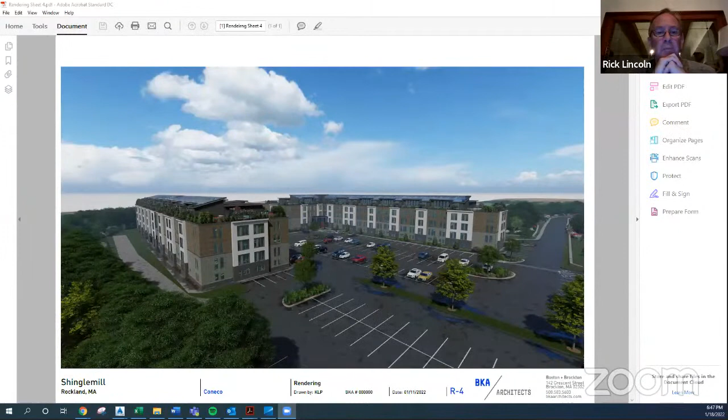So this is probably the cleanest shot, and as you can tell, it's from the far side of the site looking towards Pond Street. Off to the left there, towards the building, you're looking on the other side of the buildings, and the L is Home Depot way over there, Hingham Street.

As you can see, the entrance profile really hasn't changed. The rooftop has changed a lot, the building elevations have changed a lot, the texture, the siding and the materials used, like a cedar shingle type—that's all changed. And then the rooftop has changed dramatically.

As you can see, at least from Wilson Street, which would be way over to the right as you're looking towards the building, you'll just see the end of the building over the trees. That's also why the architects and myself created most of the rooftop green space on that side. We designed in solar, which is what I've been doing on a lot of projects, and that'll feed the electric vehicle stations and all that kind of stuff.

I guess you'd call those penthouse suites or something like that on the top. They'll be nicer units, but it has dramatically reduced, in my opinion, the massing of the whole project. Let me know if you want to look at anything else, Rick.

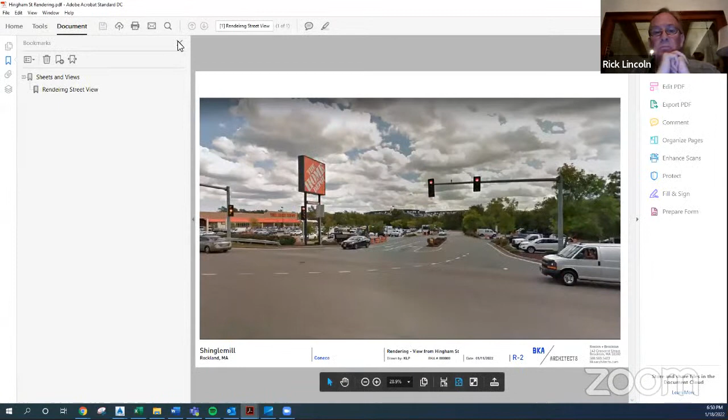There's a massing—I mean, my architects didn't like the prior massing, they didn't think it was all that accurate, but I'm not a graphics expert. They were saying this one is scaled correctly, in their terms. So it does give you a good sense coming off the highway there, the Home Depot, BMW gallery, or whatever it is over there. It does give you a sense for what the buildings will look like over the trees.

So that's a good visual of parking. You can see Wilson Street coming up off the right.

Decided to leave the outbuilding there, the amenities building. One of my versions had another L coming off the building, a 1.5 story L, but we decided that wasn't the right approach. So I left that building, moved it a little bit.

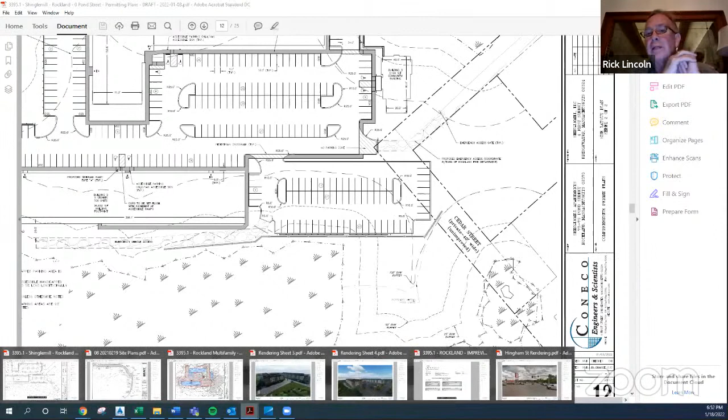We've got parking in front of it, and it's close to the apartment units. And you can see on the bottom there, right where Damien's got his, that parking used to go way down, and you can see the lot over to the right, the house. That's what I meant before by we eliminated all that area there.

We can add some parking if people aren't comfortable with a 1.55 or whatever it is on the parking ratio. Next meeting I do have some data from some of my other developments - there's something I'm doing up in the Mattapan, Boston area - just to give you a sense for how I've fared on other projects and what the parking was like and stuff.

But that's a good visual right there. You can see the green rectangle is where the other gentleman had their bar, and we just flipped it to the other side.

So I think that's that. Would you like to discuss? Well, can you just kind of fly through here real quick, and then I'm sure there'll be plenty of questions. Just run through the general plans?

No, I'm good with the plans. Yeah, I think that's it, Chairman. You can see the main access in Wilson Street and everything else, like I mentioned before, hasn't really changed at all. No, it's understood.

Are you proposing those same trails going out in the back? Yes. My intent is to come in with traverse, a full-blown landscape architectural plan. It's beautiful land back there, so it'd be great for just some walking trails, and that's it. Maybe a few park benches or something like that, but I don't think anybody wants to see us do too much back there.

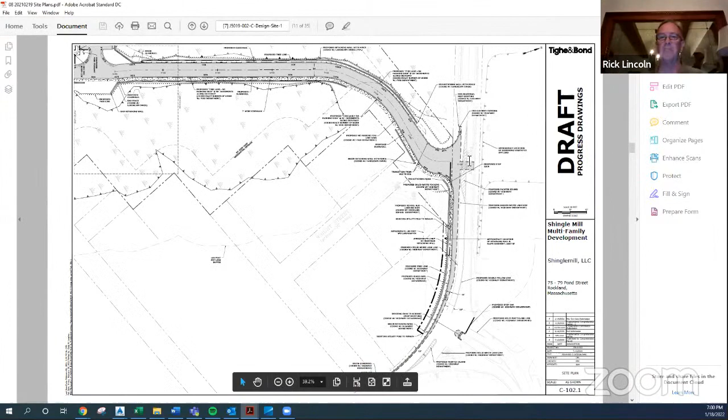Is that it, Damien? Yes. So this is the Tighe & Bond plan. Our entrance, it's going to match this, very similar. But this is from the Tighe & Bond that was previously shown.

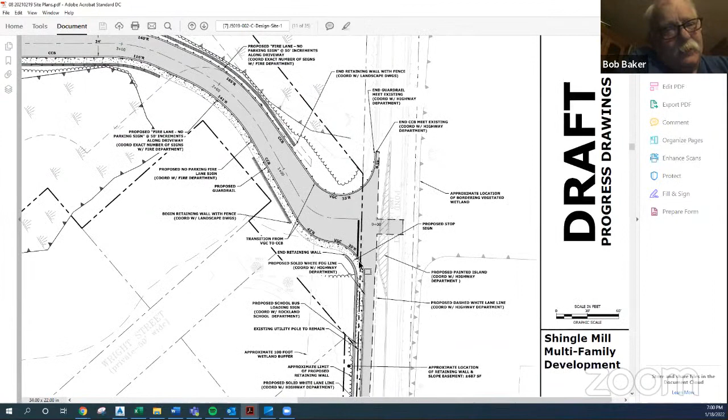Right, you're gonna end the guide rail by cutting it off, but are you gonna curb that around? You can see right here, this line right here is the guardrail. If you're cutting here, right? So these dots along the edge of the curb right there, our plan will match that. Same thing on the back side over here, where, I mean, this looks like it extends down the entire roadway. So we will be curbing it, if that is the answer to your question. Okay, thank you.

On that supplement page 12, you had up there with all the parking and stuff on it, red and blue, could you pull that up? Yeah, this is fine, the red and blue color. Oh, but you were asking for the colorized one. Yeah.

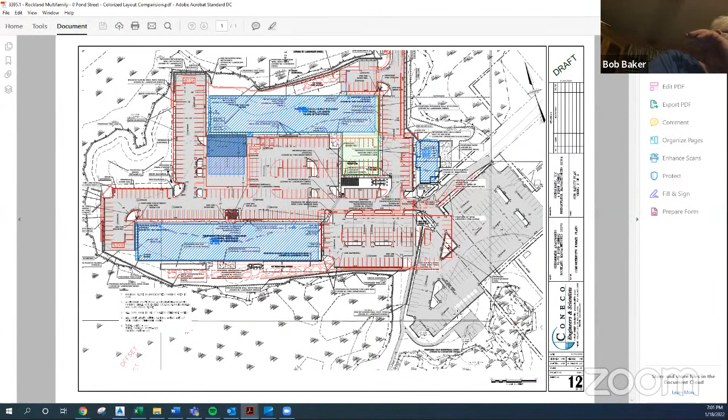You have Cedar Street as an unapproved street, an unimproved street. Who owns that street? Who actually owns that property?

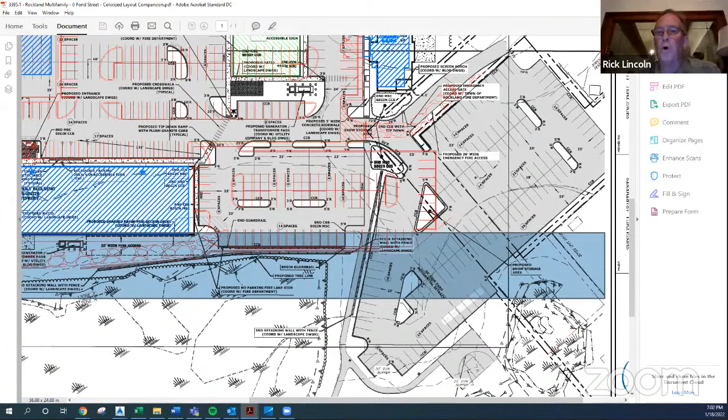Rick, do you want to handle this or what? I mean, probably Walter. I know that was discussed with both Rockland Town Council, I thought, and then Jones Street Town Council. And Walter, do you know the answer to that? So I don't remember, and we have the information and we can get it to you. The Jones Street had their title insurance company do quite a bit of title work on that area.

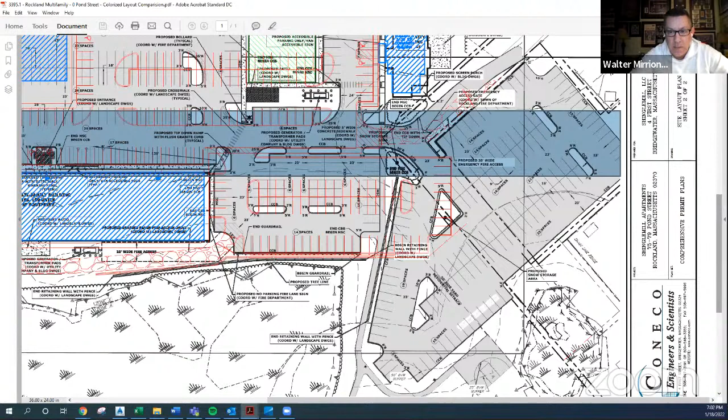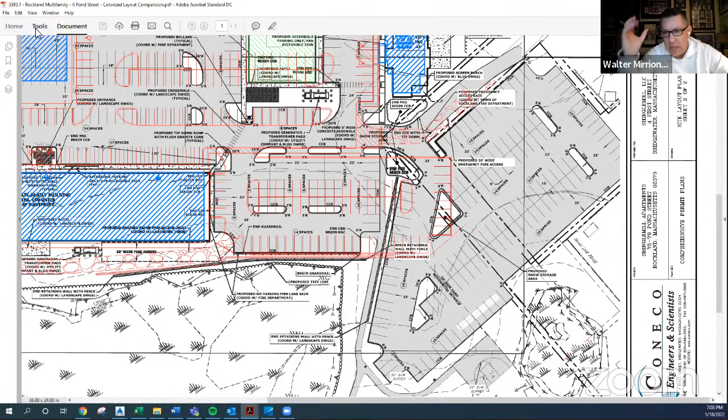The conclusion was that the developer, Rick, the owner of this property, had the right to make the improvements shown on this plan, including within Cedar Street at the lengths that it's being made. But I don't remember who they concluded had actual fee ownership. Can we go to a different plan that shows what you're proposing over those two streets? This one is better because it shows the information and we can share it with you. They did a lot of title work on it, back title, and the title company made conclusions that allowed for the improvements to be made.

They definitely state in those conclusions who the owner is, I just don't remember. But they're confident enough that they're willing to offer title insurance for the improvements over those two sections of those two streets. I'll get you the answer to the owner after the meeting. I just don't have it in front of me.

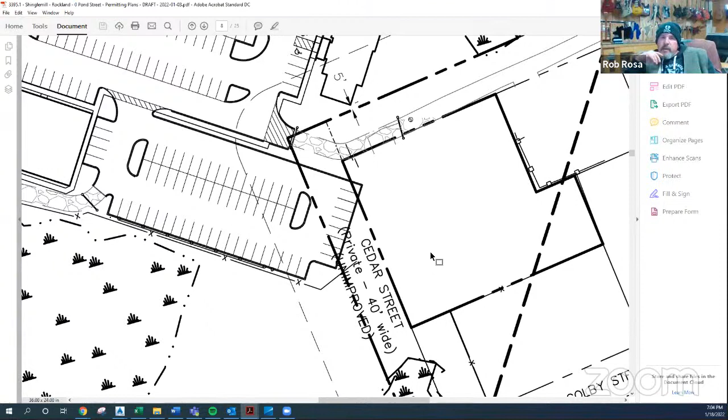It was that Rick had the right to complete the improvements that they then designed and showed on the plans, as shown in that previous version that has now been reduced. Appreciate that. Attorney Galvin, the question still stands: wouldn't derelict fee statute typically apply in a situation like this with a private road?

It's hard to say because I don't know when the street was laid out. I don't know whether the owner owned both sides of the street. It's impossible to say on the basis of what I have right now. The derelict fee statute would award the fee to the abutting property owners to the middle of the street, with an easement in the other portion of it. But the problem is they just don't know, on the basis of the facts, whether the owner reserved the rights in the street or whether it was truly left unspoken for, which would result in the derelict fee statute applying.

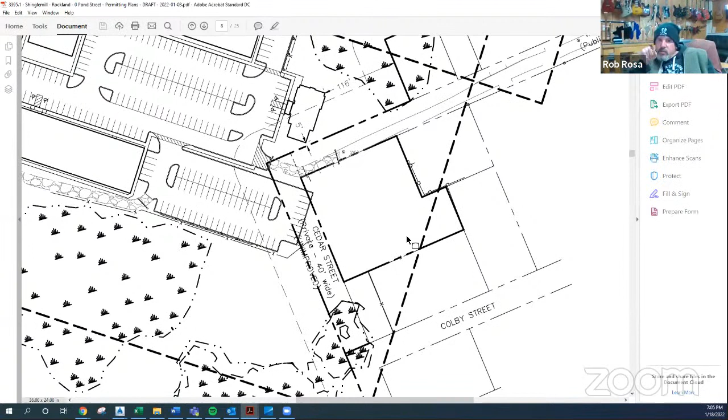The problem is that at this point, they show that Wilson Street is public. I just don't know where it's public to. I don't know - I know the latter portion of it isn't constructed. It's unconstructed, a private road, and again, it was a simultaneous conveyance, and they did not specifically retain rights in the roadway.

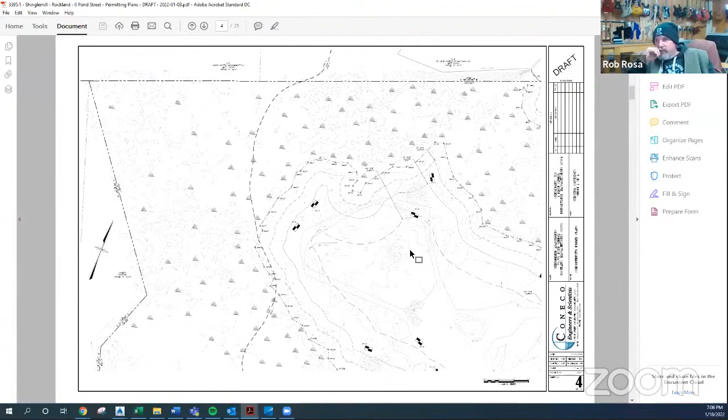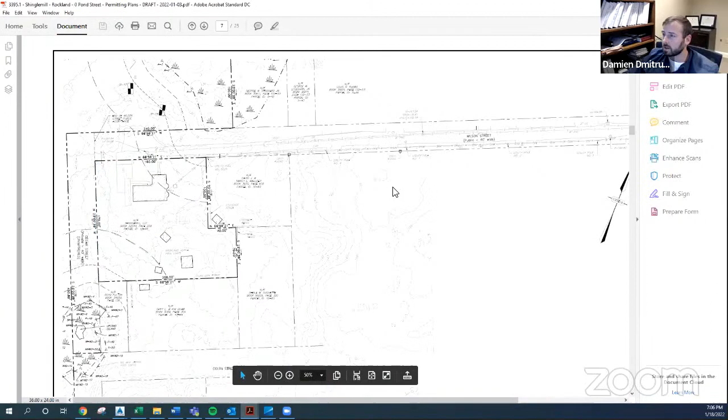I do have the plan showing - I think this was previously an end of Wilson Street public acceptance. And that makes sense at the end of the last house on the road. So this is that property, and that line shown is here. So that makes sense - the end of public acceptance is at the end of Wilson Street.

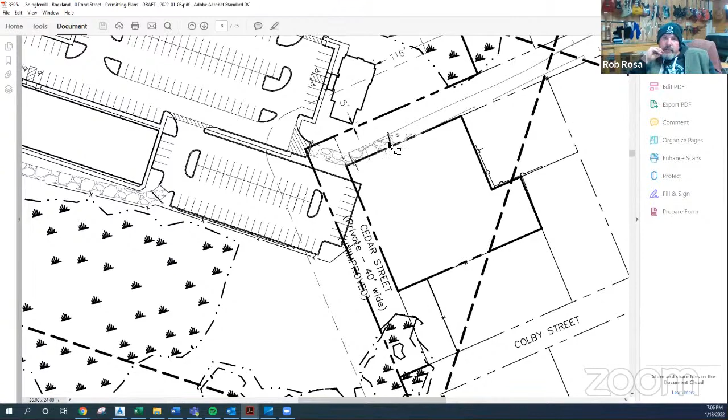So basically, all that riprap and all that stone that you're trying to put into the roadway is in the public way, and that gate is in the public way.

Does that answer any of your questions? What I'm getting at is we need to know who owns, who has the rights to the Cedar Street property, before we can allow them to put a parking lot or anything there on that private way that it's being called.

Based on what I know of that roadway, and the limited knowledge I have on property law, I believe that based on the simultaneous conveyance of the plan, the derelict fee statute would come into play there because they're going to end up owning to the center line. Each abutter is going to own to the center line, and it does not go beyond the Wilson Street property, the end of the corner of the Wilson Street property as it's going down Cedar Street. It's just a matter of who has the right to use it. It's an unconstructed way, so that's where it gets tricky. I could be wrong. I don't think I am, but I could be wrong.

I still think what it really comes down to is who has the right to pass and repass over that. Based on the last design where they were paving over onto Wilson Street, the way they designed it, there was a pass through all the way down. So if it came down to it, if those people had rights to do it, they could pass and repass on foot, most specifically, down and over. It wasn't blocked, so I think that's why they did it. But again, I hear you, I understand you, and I think we need an answer to that question.

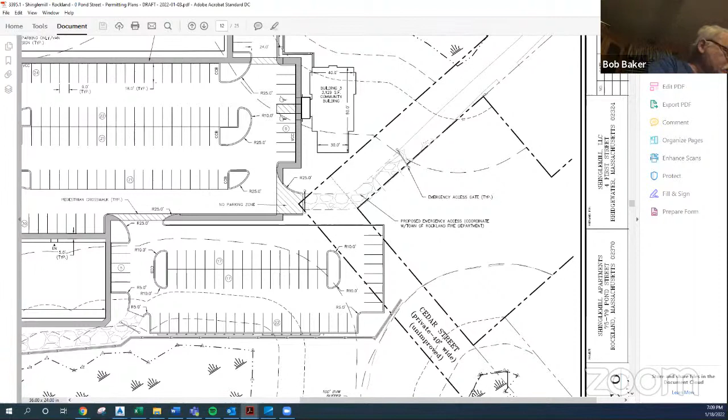One other question: the plans show 2 hydrants here. Was that cleared by the fire department? Because I don't see anything in their letter about any other hydrants. Mr. Baker, that'll get nailed down tight before the next session with the fire folks.

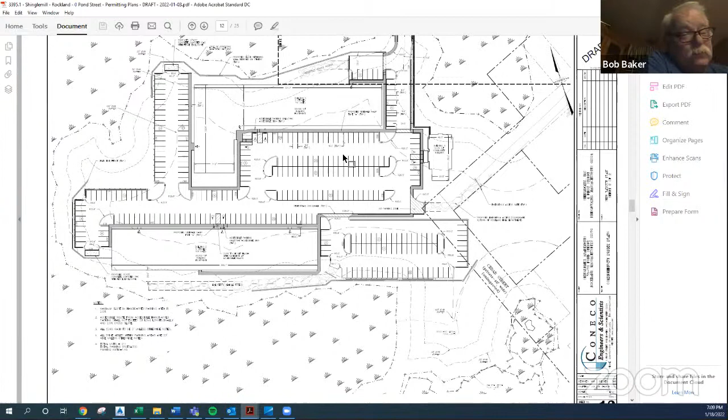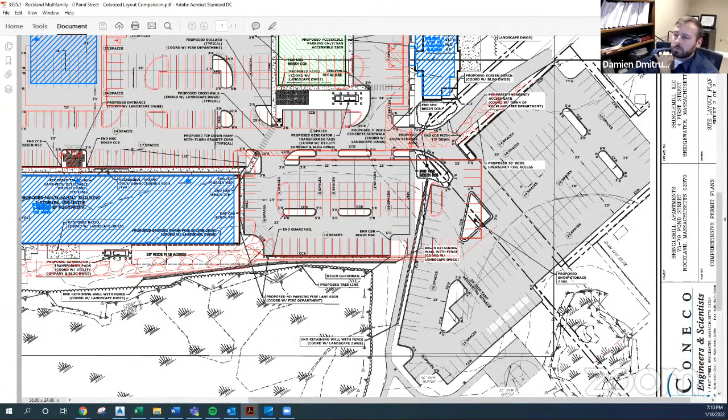One other thing: there were 2 little islands proposed for snow storage on the red, white, and blue sign. You had one towards Wilson Street, so I'm guessing that note is from the previous Tighe and Bond plans. I think you're going to need a lot more snow storage here.

Yeah, I concur. The other thing is, are you aware that this is going to have to be a no salt area? Strictly no salt. So anybody doing your snow removal, sanding, or salting will not be able to bring in a truck that has salt in it, because this is where a lot of that water is going to end up down the reservoir. We can't have sodium chloride specifically.

It would be one of the conditions if we approve this. And how do we police the no salt district? The zoning enforcement officer. We could put in a condition that there would be a fine if we found that salt was being spread on the parking lot in the winter.

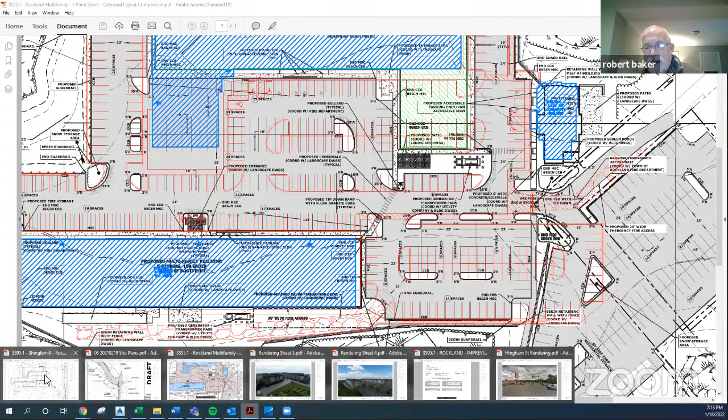Just a couple of follow-up questions on Mr. Baker's points, and please forgive me if some of these are uninformed. I came into this process when the application had been well underway, so forgive me if I need to be brought up to speed. Is it my understanding that at some point, in the current or a prior iteration of the plan, Cedar Street was supposed to be used for fire access?

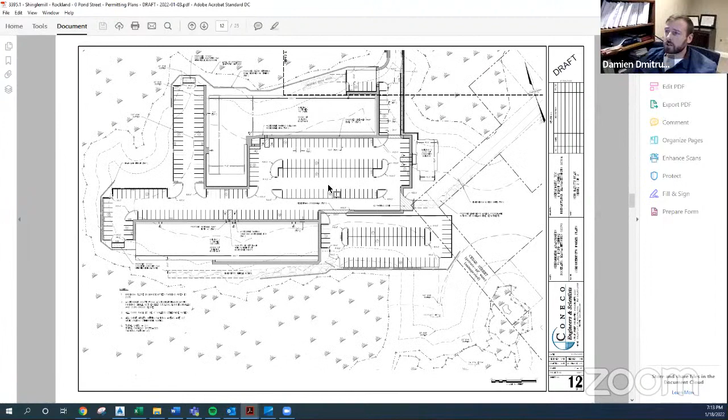No, no, all right, sorry. On the question of the 2 fire hydrants, based on your answer, were they placed without consultation up to this point with the fire department? The location of the fire hydrants, which I'll see if I can pull up here - I've been working on this project since before Tighe and Bond. There was one shown here that was in consultation with the fire department for easy access if anything were to happen in these areas, reaching out to the wetlands.

Granted, as Rick had said earlier, I don't know if they've seen these plan sets specifically, though they did have their comment letter. We will be contacting them and working more with them to resolve any hydrant issues. Okay, but as to the specific current or proposed location, the answer to my question is no. Okay, yes, they are relatively located.

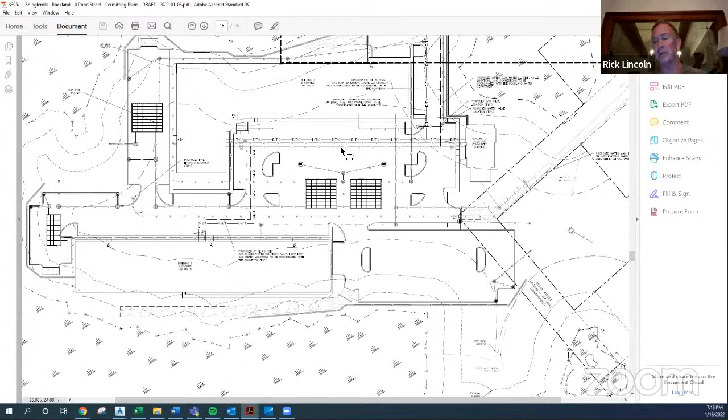Hi, this is Rick again. So the pump test is, we know there's enough supply. The pump drawdown test, if you will, is really meant to determine or make sure there's no surface impact, for instance in the wetlands. So these piezometers, they run around and put measuring devices within a radius of the respective pump tests, and they can measure any potential drawdown. We don't think there will be.

That's just an opinion, but these wells are 700 or 800 feet down in bedrock. But that is a requirement by DEP. Honestly, I was going to do it in the fall, but we kept hearing that the water department was testing a particular station. The short story is I would prefer to hook up to town water, no doubt.

But we'll probably wait on the pump test until closer to spring, which hopefully isn't that far off, a couple of months. I appreciate your confidence that there's plenty of water there. How do you know? Well, they did some preliminary tests when they drilled the wells, and we've got the engineering demand study, so we know exactly what DEP requires for that bedroom count out there.

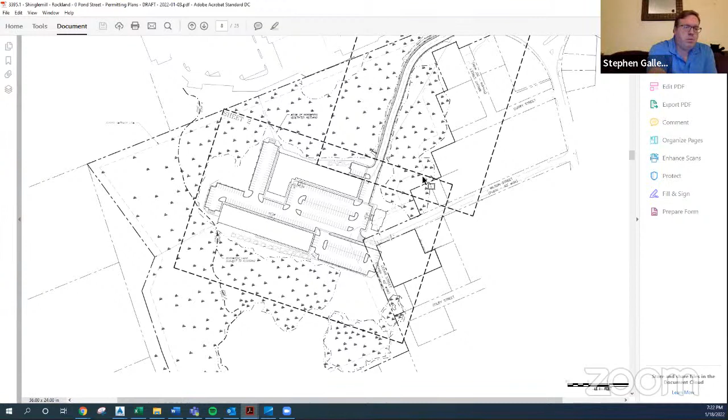Keeping going around, going to board member Timothy Haynes. Mr. Haynes, talk to me, sir. Oh, hi. I don't want to beat a dead horse, but in the conversation about Cedar Street, I wasn't clear about a couple of things that came up.

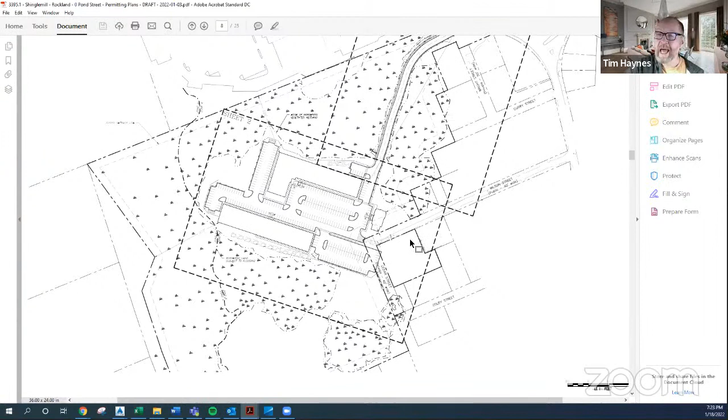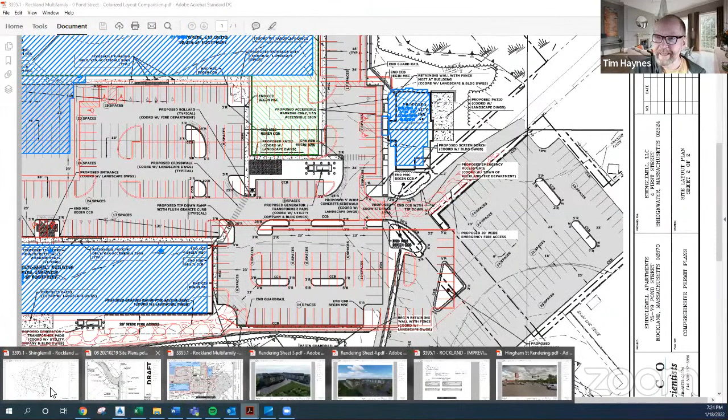One was the previous proposal having a gated emergency access to that way, and one of the answers we got to that question was no, but I'm under the impression that was something the fire department wanted. So it's on the overlay plan, the old and new together, so it's still showing from the old plan. In conjunction with that, that publicly accepted part of the road has a lot of new grading on it, so I'm not clear what's being proposed or eliminated there. Could you clarify: is there going to be emergency access there? Are you waiting to hear from the fire department if they still need it? And is your plan to put the grading shown on the grading plan into that public portion of the street?

Well, I'll take the easy one. I know the fire department still wants it. I won't put words in their mouths, but that's generally the case, right, just a secondary way in and out.

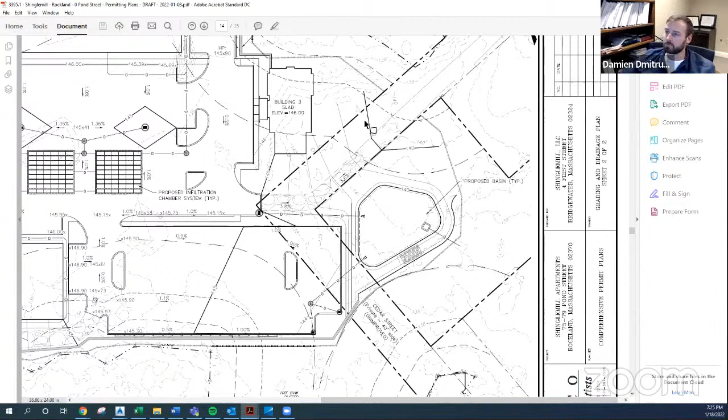The grading, Damien, I don't know if you can comment on that. Yeah, so the grading is required for the access to bring the site up. We can tighten it, we're just trying to make it safe there, calling in the grade, trying to step us up so we can get into the site cleanly and smoothly. I think you're talking about access on Cedar Street, that was never proposed.

There has always been, in the old plans, this gravel kind of hatched area right here as the access. So yes, that access is still there, and the grading is tied in that way. If you were to build a road, I would imagine it is a public access way, but we will be preventing it due to fire emergency, there is no access to other sites. So the grading is to provide access to our site, which happens often. With many sites, you grade at the front of the entrance into public ways, it's part of access.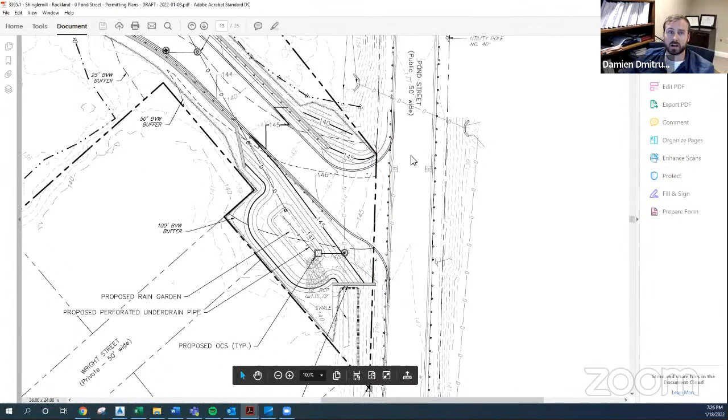Great clarification, I think I agree with you, it's probably going to be desirable, but it looked like you were making some grading changes to a public way. That goes to the question of who owns that street at that point, because it's beyond the publicly accepted line. Yeah, but it happens that there is grading and access done, access is required to get into the site, and it's done in a public way, it happens with any type of development. Absolutely, so grading and access to a development happens in the public right of way, I guess, as normal circumstance. Agreed.

I'm just pointing it out to wrap up that conversation from earlier, where there were some conflicts in what was being answered in terms of access, getting fire department access, and improvements. The improvements that Bob was talking about were on the paper road side, but I just wanted to point out that in fact it is on the public side as well, so I just want to make sure that's clear.

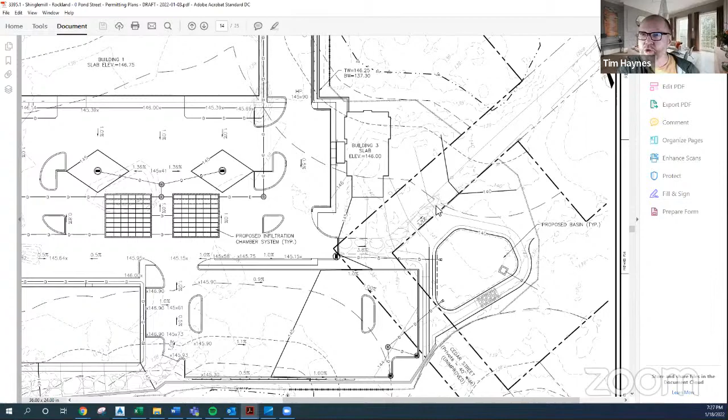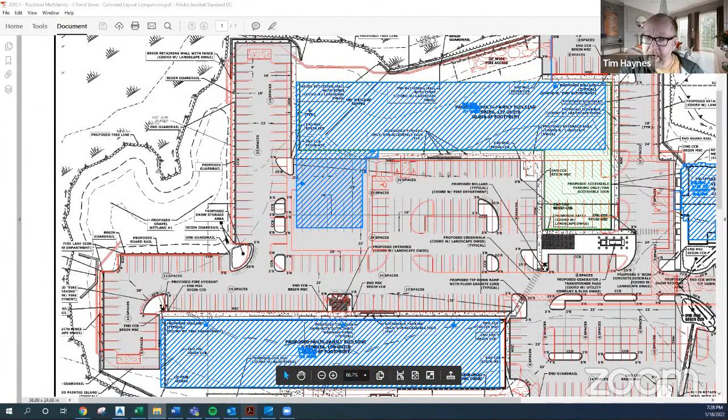On this plan, the one numbered 12, your grading plan, could you clarify where we're talking about on the upper left side, on the grading plan? The plan that I have, that one, could you clarify what's going on with the grading there? Because it wasn't clear to me what's being eliminated over there and how it's leveled, and whether that's now going to be at the grade elevation of the parking lots, or is there still going to be that drop off before it becomes level?

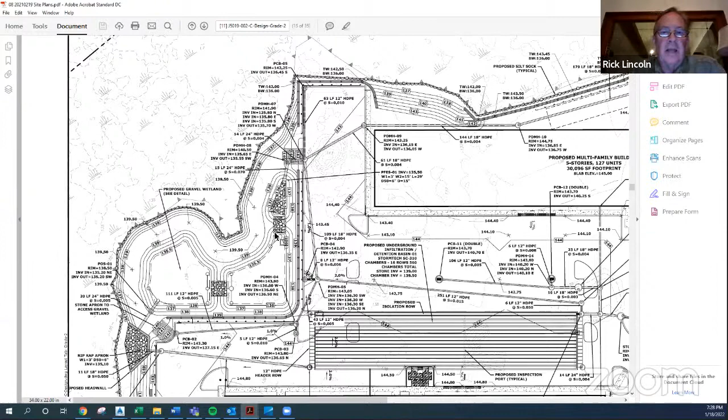Haynes, I will probably eat crow on that one right now, because when I saw that, there's obviously a disconnect between the architectural rendering and Damien's plan. That's not the plan, Damien. I was trying to show the differences between what was previously there.

You did indicate in your conversations that the grading shown on the architectural plans here isn't clear on the fact that grading does go down. That will be landscaped area along that edge. We're just catching grade as quickly as we can, going down at a safe, normal slope to get into and avoid as much impact into our buffer area as shown. But we could potentially run that retaining wall down there and connect to the other retaining wall along that whole edge and stay out of the 25 foot.

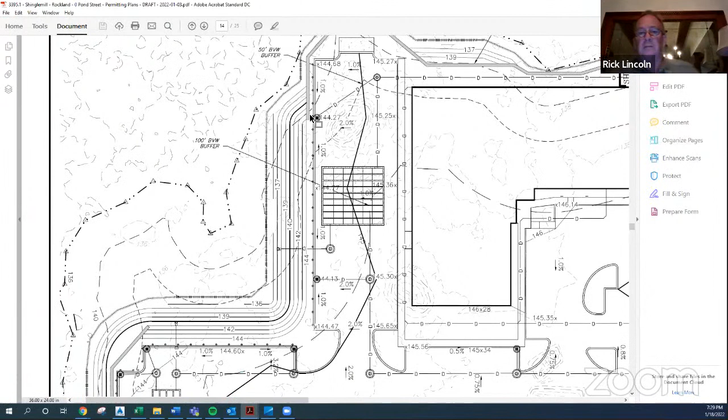And that's my bad. So yeah, obviously there's some disconnect between the things we were talking about and the rendering and the grading plan.

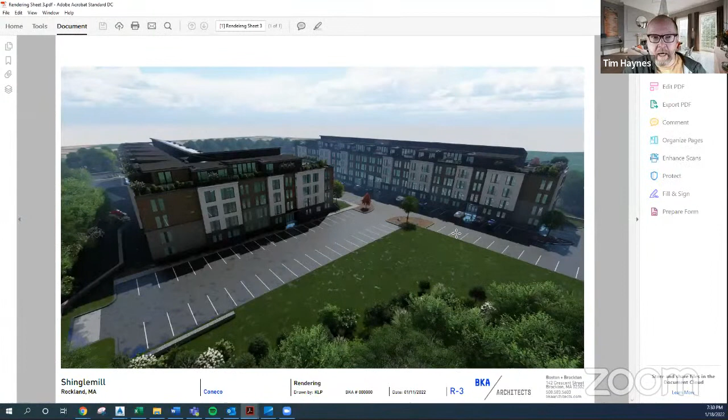So the reason I wanted clarification on it, besides just the disconnect, is one, to tell you that the architecturals are significantly improved, in my own opinion. They respond to our architectural reviewers' comments. I think the massing is good, the style is great, the materials are vastly improved. So I think that deserves commendation for what you're doing there. It's just significantly better than the previous architecturals.

It responds to those comments, but we have never been able to get any traction on a significant issue, which I thought was going to be resolved in that green space, if that was level on that side. And it's that when we would ask about affordable plans, having enough room for families to live in, for kids to be here, for people of all family dynamics to enjoy the affordable housing coming to our community, there's a clubhouse and some dog walking and some outside trails, but we never really got recreational facilities for all ages, and particularly for families with kids, places where people have to take strollers or kids who have to ride bikes. We talked a lot in our hearings about this shortcoming.

You've got a very isolated site, and there's no playground. There's just nothing for all ages. It's got a clubhouse and a half court. We even talked about the sidewalk being on the other side of the road so they could connect and ride back into the neighborhoods. We talked about connections on the surface to ride bikes and to connect into the fabric of the neighboring streets so kids could visit friends. None of those things have been addressed, and it's a real shortcoming of the project.

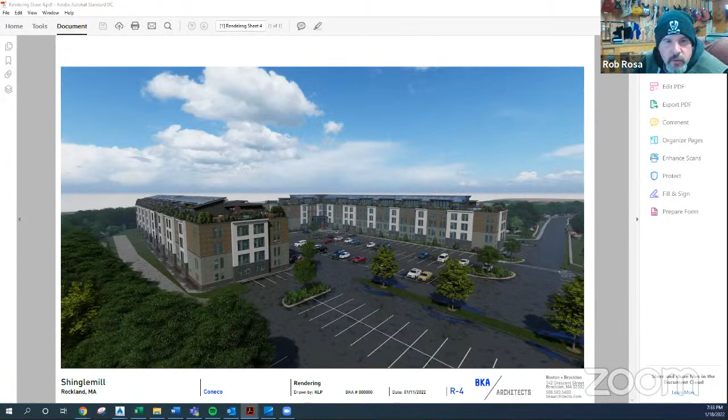Mr. Haynes, thank you. Question for you -- you appreciated the renderings as such? Yeah, awesome, really great use of massing, really great. If you can have that much greenery on the roofs and keep it alive, I think it's a tremendous improvement.

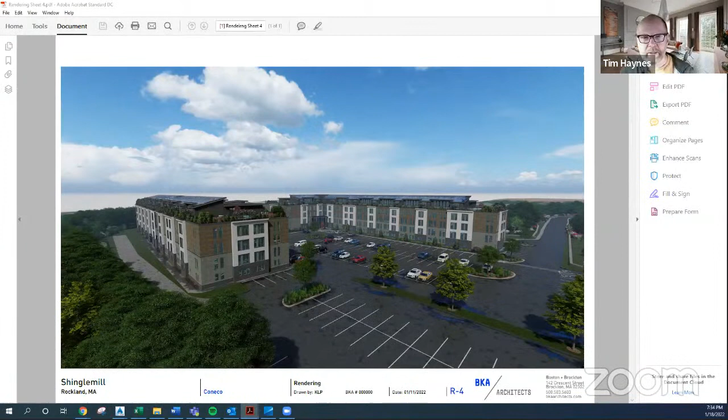Nice. I like how they incorporated all the oil spots on the parking lot for all the people paying too much for their apartments -- they can't afford to maintain their cars. I like how they did that. That's true to life. That's cool.

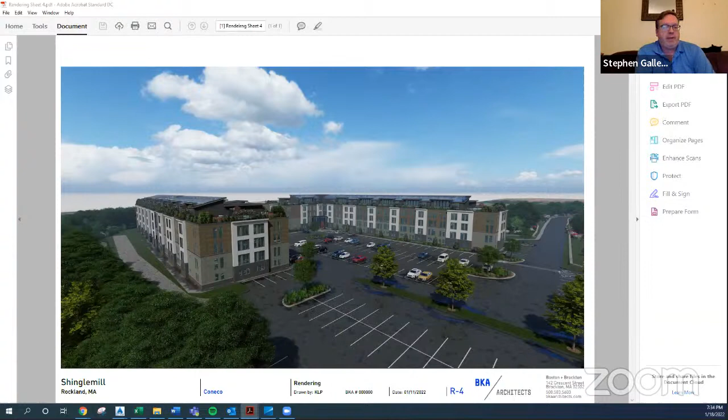One thing I wanted to ask about earlier, Mr. Lincoln mentioned that we reduced the parking ratio from the prior document to 1.55. I remember we were talking about parking, and it was a tense thing where we wanted more, and it seemed like we reached a ratio people mostly agreed on. His comment was that 1.55 would be more than most of his other properties, and later he mentioned Mattapan in the Boston area. My thought is, if he's comparing it to Mattapan, that's an area with more public transportation. So I'm wondering if he's comparing this ratio to other similar projects where most people drive.

If you're a resident of Rockland, you can't walk to the supermarket or the gas station. Not that you wouldn't drive to a gas station, but if you wanted to get a pack of cigarettes or a bottle of soda, you can't walk there. You have to drive everywhere here. Want a gallon of milk? Diapers? You have to drive everywhere. So when he says this parking ratio is higher than his other properties, is he comparing it to similar populations and areas like Rockland, where you have to drive everywhere? That's my question.

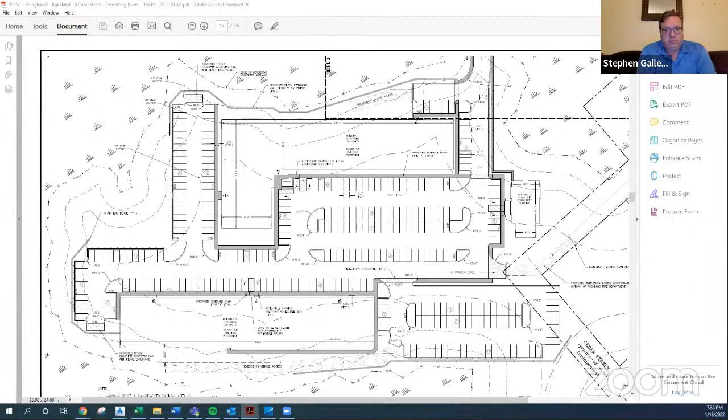Chairman, can I? Absolutely, go for it. This is Rick - that's a perfectly fair question. Maybe the Mattapan comparison was a mistake, although that particular project does have public transportation there, though you can walk somewhere within half a mile. And City of Boston probably isn't a fair comparison, because they have a parking ratio regulation of 1.0 or less. Whether that makes sense or not, to me that's a bit arbitrary.

So I did two projects in Hanover. There's one in Easton, I did one in North Attleboro. The one in Easton is a new permit and we're aiming for one. The town there took a different approach and wanted me to drop the parking because they wanted green space and less impervious surface. The stuff in Hanover, honestly, there wasn't a lot of input either way. There's one I did next to Cardinal Cushing, across from the Oz - that's like a 1.39 or 1.4.

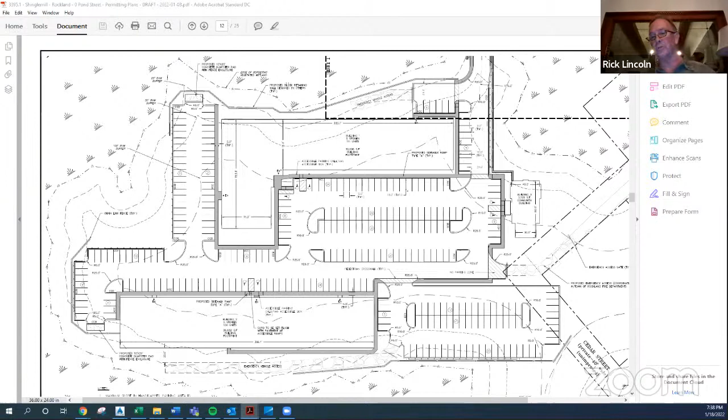Mr. Haynes, to back up, I agree with the whole amenity thing. I'll say that on the parking topic, Mr. Galley, we've run statistics on the number of kids in the apartments, because back in the day, 10-15 years ago, the fear was always kids in the schools. The number of children in these apartments - I don't know if it's the rental rates or just people in general these days - but you tend not to get any children at all in these developments. I'm not negating that we need more amenities, but at least in my experience, that's what we've discovered. Sorry I digressed a bit, Mr. Galley.

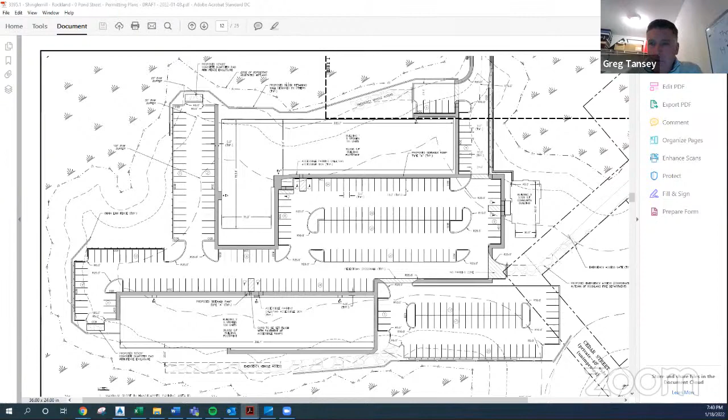My concerns have not changed. My concern about this site - I've got concerns about the parking, I've got concerns about the well. Where are the wells located? Just out of reference.

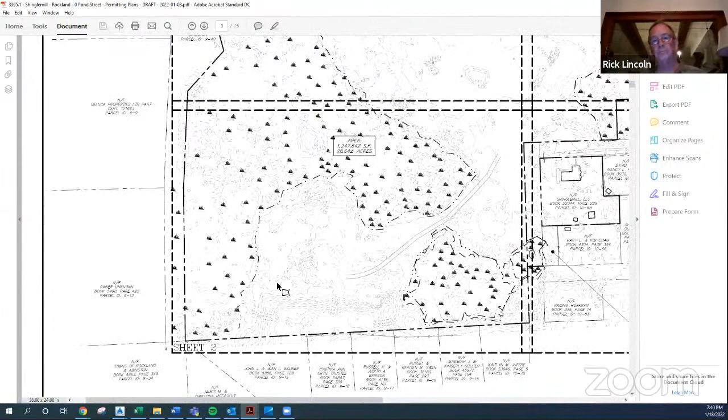Yep, that's where all the walking trails were or are. Could you show me relative to the site development? Yeah, down there. Is there a cluster of three? Yes. One or two tend to get used - DEP requires a third well.

And when were these installed? It's a guess, maybe last year - with COVID, it could be a year and a half, I don't recall honestly. So you installed them without an order of conditions? Yes.

Where is Zone A to the reservoir, the tributaries to the reservoir, relative to where those wells are? I don't know if you have that map, Damien. Honestly, I'd probably let on-site engineering speak, because I'm not as well versed with Zone A and public water supply, not the reservoir, but the 3 wells that we're proposing.

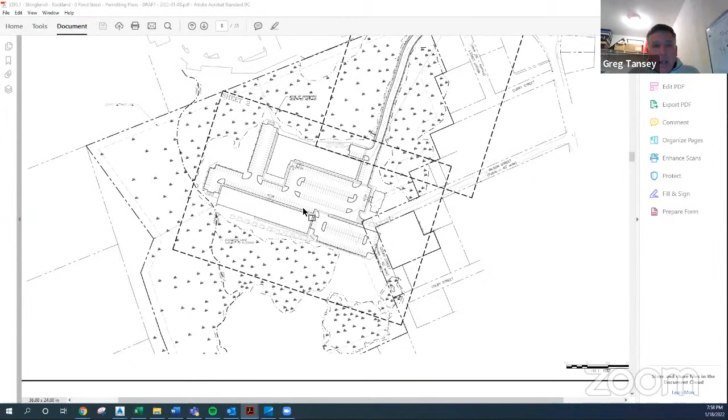If you had taken it serious, you'd at least be showing the tributary areas and the associated Zone A aquifer protection areas on the plan, and how they relate to where your wells are located and your stormwater recharge units are located. I don't see, on the plan that I'm looking at - this would be the perfect plan to show the tributaries, to show the Zone A areas, showing the recharge units and the wells.

I'm done, Mr. Chairman. I've said my piece.

Mic drop, Mr. Tansey. Thank you.

Can I follow up on Mr. Tansey's point? Mr. Baker Jr., please do. Thank you, sir.

In my professional life, I've seen a lot of reports that have typically contained disclaimers. I can honestly say I have never seen a report the proportion of which constitutes a disclaimer that is as high as this. You are looking at 7 substantive paragraphs of disclaimers covering almost 2 pages. Forgive me for reading this, it's just so much, I couldn't commit it to memory. But if you look at the end of the report, again, 7 paragraphs of disclaimers regarding the accuracy of the findings of the report.

On such topics as subsurface contamination, remediation of subsurface contamination, the reliability and or accuracy of the information and data they relied on in preparing their report, whether the applicant had submitted to the reporting entity all of the relevant information needed for Tighe and Bond to do their study. As Mr. Tansey already referenced, it's questionable whether PFAS were included in the analysis, and they make no guarantee, as Mr. Tansey mentioned, that the report will pass a regulatory review.

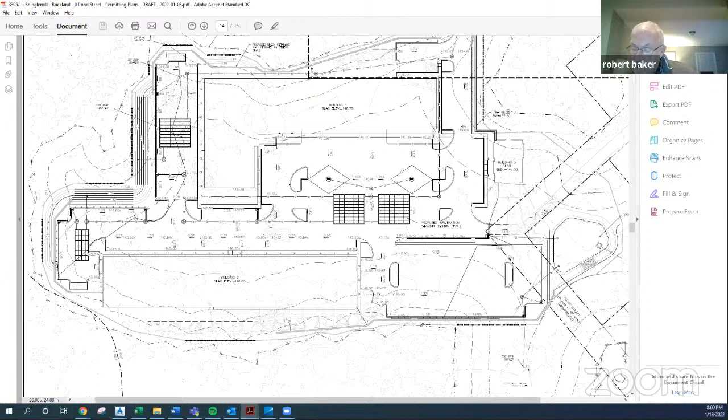Every one of these disclosures, I would suggest, are enough to suggest that we need to take a very careful look at this, and actually, forgive me for the harshness of this term, questioning every bit of information that's been submitted to us by the applicant. I mean, it's fundamental. Architecture is one thing. It's great that the project looks nice, it's wonderful that it has grass, not too much on the recreational amenities, but the safety not only of the residents of this proposed project, but the safety and health of the residents, visitors, business people of 2 towns, as Mr. Tanzi said, seems to have been not addressed in any significant way by the applicant.

Now, I realize I'm a non-voting member on this particular matter, but Mr. Chairman, would it be appropriate as such to make a couple of requests?

At this point, when it comes to requests specific to conditions, let's take it one step at a time. Mr. Baker, please, talk to me about requests.

One request I would have is that the applicant, prior to our next meeting, provide all documents from the DEP authorizing the digging of the wells to which he referred. Second request, similarly, that the applicant provide all the data and information used by Tighe & Bond in preparing their report.

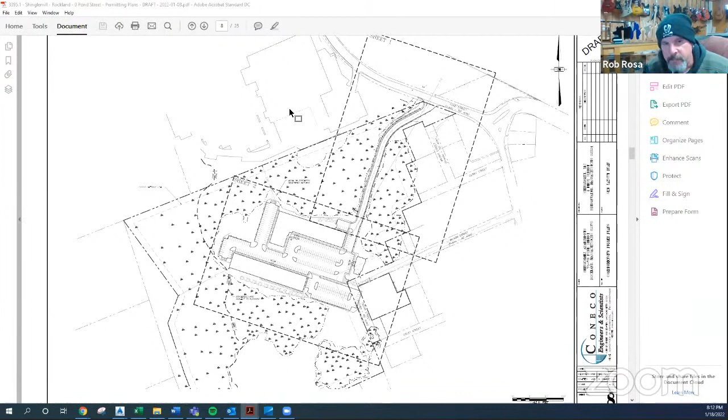Mr. Tansey, let me interrupt you real quick. Mr. Lincoln, have you read the test report? So let me back up a second — the short answer is no, sir, please answer my question. Have you read it? The short answer is no, because I didn't commission it.

I wasn't involved. Coneco's report, I did read. Okay, why do we have — and again, do we have a copy of this Coneco report? You should have — like Greg alluded to, it has been a while so I've forgotten, but we've submitted all of that data.

I will say I get the distrust of the big fancy engineering firm with all the disclaimers, and I'm not going to defend them. But the one disclaimer where they talk about the regulatory audit, that is fairly common in the environmental business. What that really means is that DEP, on all these sites, when these reports get filed, has the right to come in and audit — could be 3 years, could be 7 years, could be 10 years.

It's no different than a CPA firm with their disclaimers — they may give an audit on a firm, but they're not going to guarantee there's been no embezzlement. That's all they're saying. They'll defend their report with DEP, but they can't guarantee DEP won't arrive and make them do more work. That's all that means. Respectfully, Mr. Lincoln, a nine-paragraph disclaimer is not typical in any endeavor.

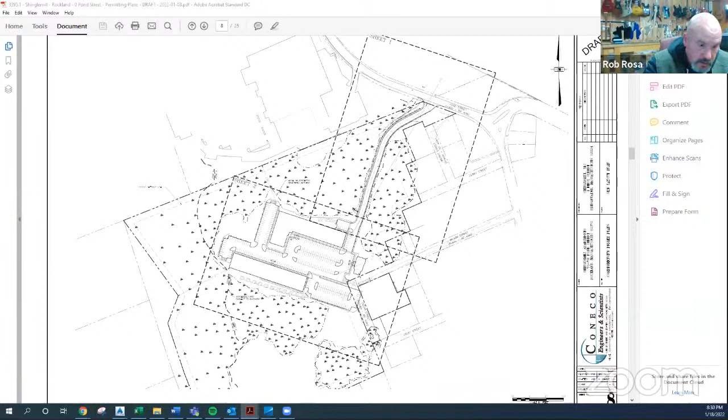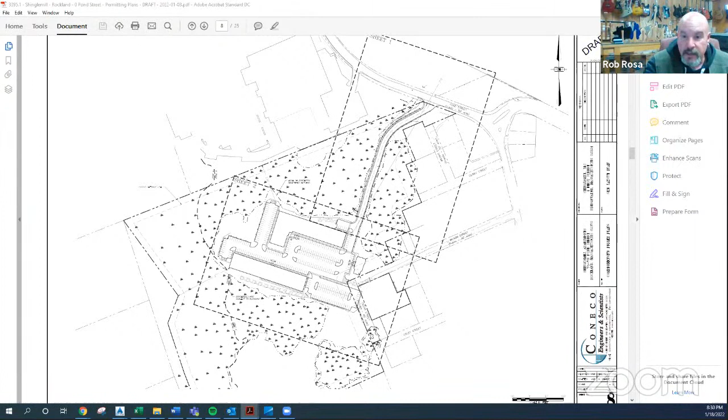Either way, we're gonna have to have an amount of money to fund the engineering. I don't know the estimate, I don't know what's in the engineering account at this point. So we're gonna have to review the engineering account, talk to Pat Brennan, get his estimate on what it's gonna take to do that. We're gonna have to get a number from the LSP too, but we can't do that until we get the documentation.

There's our architectural and design review as well. That's again up to Mr. Lincoln if he wants to pay for this. We do have the right to request it. Let's stick with the environmental first and see if we can get through it.

I'd love to put BKA in, have a chat with somebody, but honestly, it's not de minimis, but I just want one step at a time, if you don't mind. I appreciate that, I absolutely do appreciate that.

That was a peer review that we had, and so it's somebody who's on board. It's just we have all new architectural. So it's okay to defer it, but it'll just make the process go that much longer.

So Mr. Lincoln, from what I'm hearing, you want to look at the engineering and environmental stuff first, if you don't mind. Tim, does that work? Because again, we're gonna have to look at a pro forma too, because we never got answers on the last one.

Yeah, absolutely. I think it's good we will have a conversation about the things that we would expect as we move along. The timing, the pace at which we go, is determined by when we get information, and then having a peer review with that information, and then coming back with a response. So, no, I agree with you.

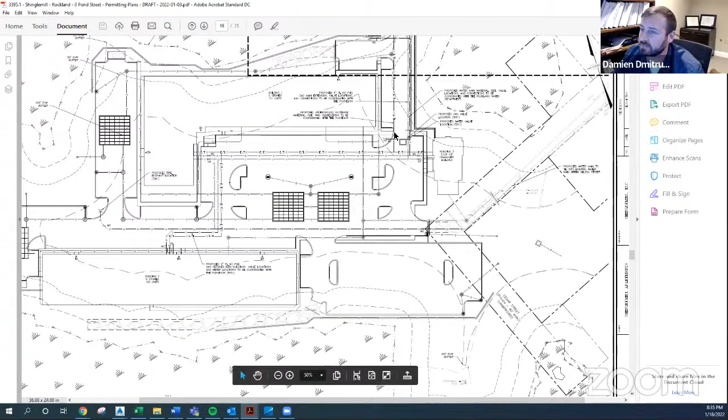I will note that last line, where no dead end water mains, that the fire main water should be looped. We currently do have it shown this way coming up and through the site, so that's already been answered. Okay, but as far as the other stuff, that's just details, that shouldn't be an issue of pulling together.

All right, what I'm gonna suggest at this point is don't touch it. We're gonna basically supply Pat Brennan with a copy of the site plans, a copy of anything else that comes in. I think that's the only thing thus far that's gonna come in. So we'll give him the site plans, the fire letter, and he'll start reviewing everything based on that.

I'm thinking we can give permission for you guys to talk back and forth, maybe take care of some stuff prior to the meeting, prior to him coming back, try to speed things up. Because are we like 2 years into this now? That's what it feels like, a very long time. So if we can try to speed this up, however it lands, it would be nice. So, Mr. Lincoln, does that work?

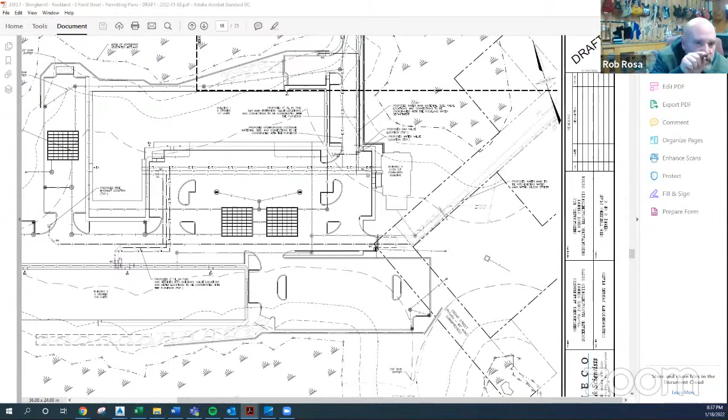Yes, sir. Giving permission for Pat Brennan and your engineer, Mr. Dmitruk, to talk. All right, Ward, is that okay? Do you think we can allow Pat Brennan and Coneco to talk back and forth to try and speed some of this up? Is that fine? All right, so that's fine.

Don't forget, not needed now in the interest of kicking a few things as information develops, but we did have a traffic study, and as the amount of parking and number of units changes, we'll want some review on the changes. It's certainly not going to be as extensive as we had, but there's somebody to review - that's Gill and Associates. So we're going to have Mr. Gillen look at the plans, come up with a number for review purposes.

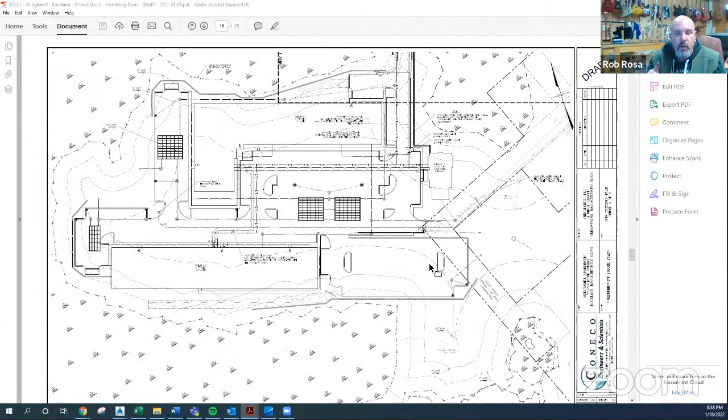I'll gladly call Pat tomorrow morning so he's aware of this. Deb, there's going to be money coming in for Pat Brennan, for Gill and Associates. Basically 3 checks, I think that's how it should be - 3 individual checks, one for engineering review, one for traffic study, and one for LSP.

Mr. Galvin, do you have anything to say at this point? I think we've exhausted everything, and we all know that this is kind of a... No, we'll help you get the appropriate person to read the Tighe & Bond report. What I was looking through on my notes is to see whether that Tighe & Bond report was ever submitted to me, and apparently it was submitted to the Conservation Commission. So when Mr. Tanzi asked me if I had read it, I hadn't, because I hadn't been involved in anything involving the commission. So it should be reviewed by someone that knows what it means, and an LSP is the appropriate person to tell the board what it means.

All right, do we need a motion for all this? Just one more thing, Mr. Chairman. Oh, absolutely, Mr. Baker. It's my understanding that Mr. Lincoln has agreed to provide, prior to the next meeting, all documents from the DEP related to the 3 wells that were dug, and any information and data he can get from Tighe & Bond that went to their report. Mr. Lincoln, confirm that you're going to be able to do that.

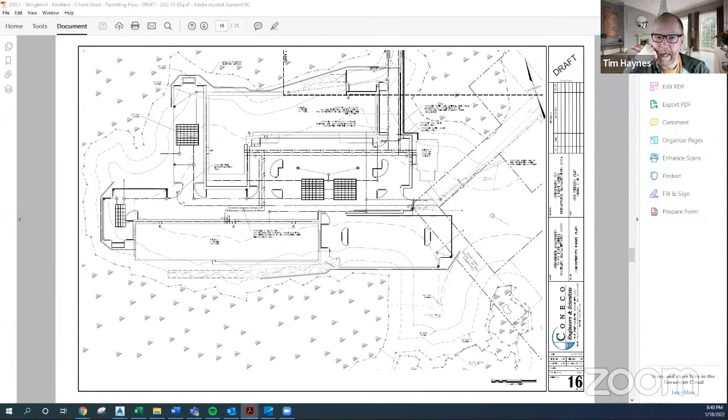Yes, sir. I don't know about time, I don't know about Tighe & Bond stuff, but I'll do my best. We will get Coneco's testing - that should have already been submitted, but I'm going to submit it again so it's current. Probably has been, but when you look at the number of documents we've supplied, even just on the website, there's a lot. Let's leave it at that. Understood. So if it's easy to forward via email, I'd rather do it that way - just keep it simple for everybody.

All right, so again, Attorney Galvin, do we need motions on any of this? You'll have to continue the public hearing. You have an extension for the public hearing process through February 28th right now, so your next public hearing will have to be in advance of that date, or you'll need an extension.

Deb, what do we got for dates? We're into March at this point - March 1st or March 15th. Okay, we got nothing on March 1st at this point. No, nothing. All right, so if we continue to March 1st, we're going to need an extension on the public hearing, and it probably makes sense to extend it through the end of March.

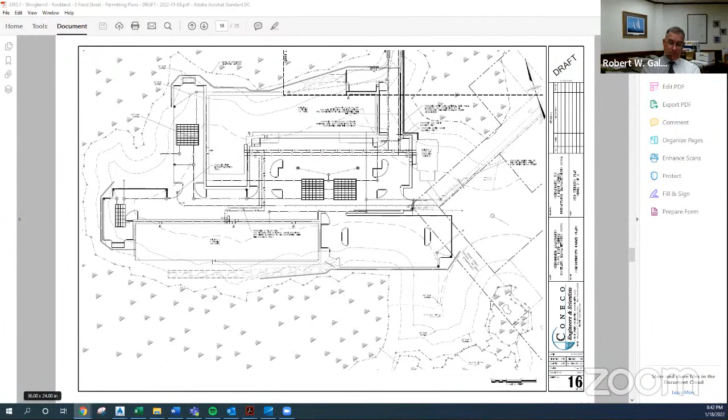Again, it's Mr. Baker. If you'd like, we can open it up to the public, but there's not a lot we're going to hear that's different than we already know. That's my concern, and one of my big things is beating a dead horse. I agree. At this point we all know the concerns: environmental, the lack of water, the lack of sewer, the fact the site is potentially contaminated, but we're going to have it reviewed. We don't like 5 floors. The traffic is going to be awful. We know all the concerns at this point, and to keep talking about it is just going to belabor it. If somebody's got something different that we haven't heard before, I'd be willing to hear that.

Well, Mr. Chairman, there is one other concern. Please, bring it on. You've read the fire report, right? From January 7th - one of the concerns, from the fire department: the first line, the Rockland Fire Department has multiple concerns with the Shingle Mill project. This project is at the edge of our response area, creating response times exceeding 8 minutes, well over the NFPA 1710 recommendation of 4 minutes.

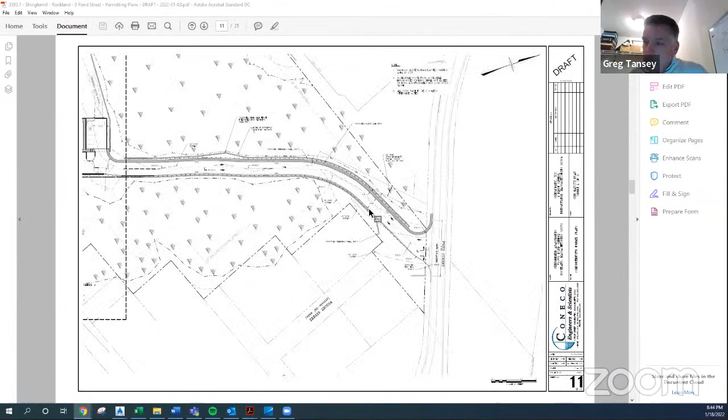To me that's concerning. With the mass of these buildings, you've got five floors of buildings of this mass at the edge of the fire department's response capabilities. He also said it'd be difficult for responses from Hingham and Hanover, but he's saying it exceeds 8 minutes, and the recommendation of 4 minutes is what's considered safe. So this exceeds a safety factor of beyond 2 - from 4 to above 8. That's more than double the recommended response time to a fire.

Oh, I absolutely agree. And it's not like it's a single family residence - this is probably the biggest proposed residential complex, and it's still 5 floors high. Fighting fires at the massive scale of a building like this is one thing, but getting that water up 5 floors to save lives and put out a fire - there's some issues here.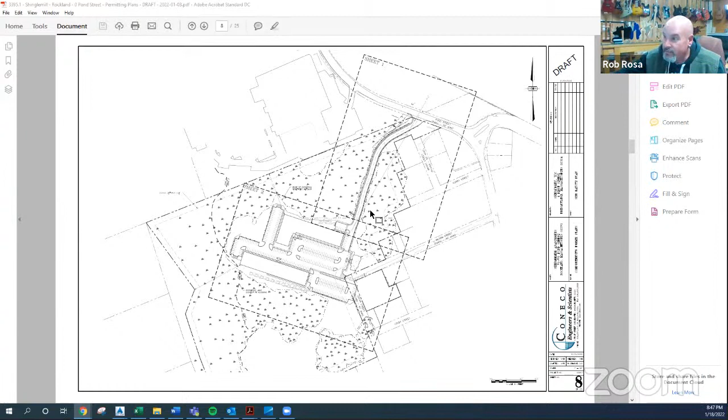I'm not saying it's something we can't look at. We have to look at that, we have to understand that. But I think that's why Deputy Chief Heaney says all this.

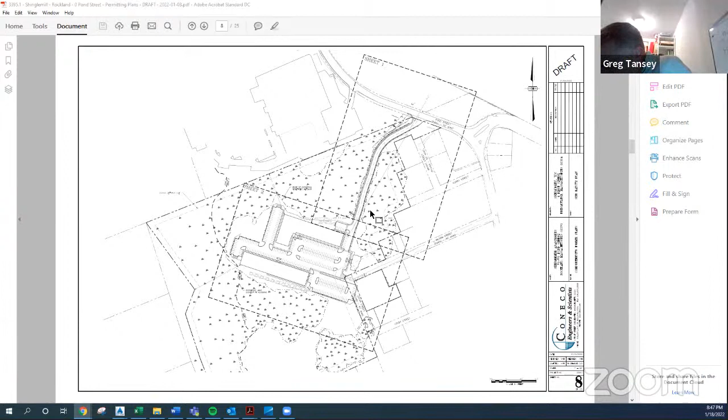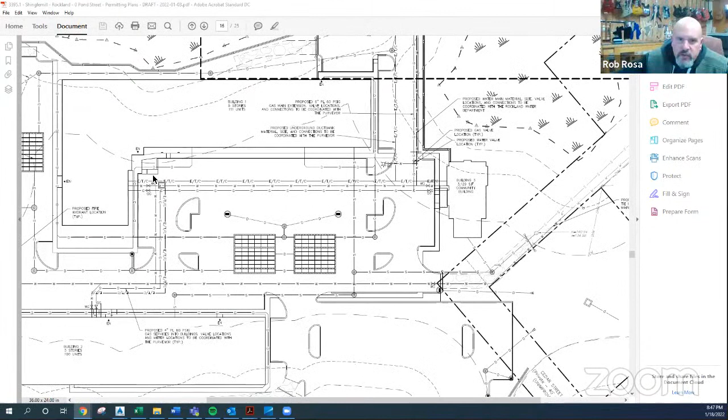And they get the connections out onto the Rockland water distribution network. I think - correct me if I'm wrong - it's sounding like he wants this water main to be looped, because he says he will not accept a dead end water main for this project. The last sentence on number 5: the Rockland Fire Department will not accept a dead end water main. I think Mr. Dmitruk already said that he looped it. I think he said he did. I know he said he did.

I'm looking right now - yeah, I couldn't tell from the plans how it was being looped. When he says looped, he's not talking about looped within the site. He's talking about from point A, the origin of the distribution network, into the site, and then back out of the site into another point B, into the existing distribution network - that is what a loop is. Yep, so as shown here, we're coming from Rockland, the water from Pond Street, up the main access, coming into the site and then back out, tying into the water main here in Wilson. So it is looped.

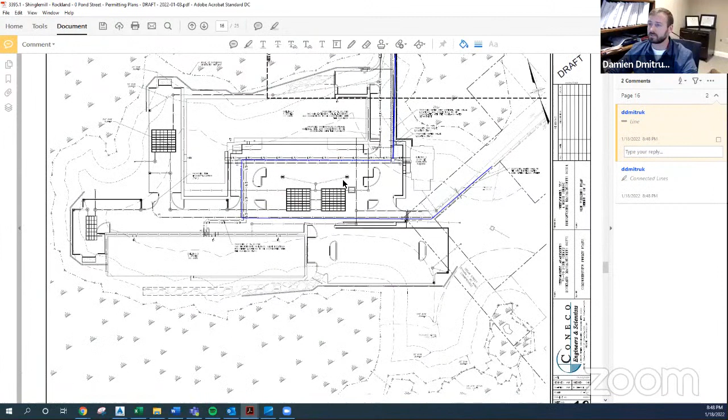Does that constitute a loop? Yeah, it's looped back in. I'll have sites that come off the water main and go into the site and then right back into the water main. We're actually accessing separated locations, and I could loop it back up the main access, but that would not be as proficient or efficient.

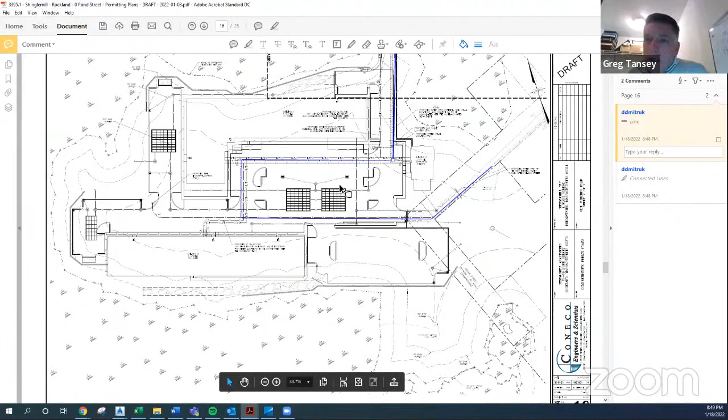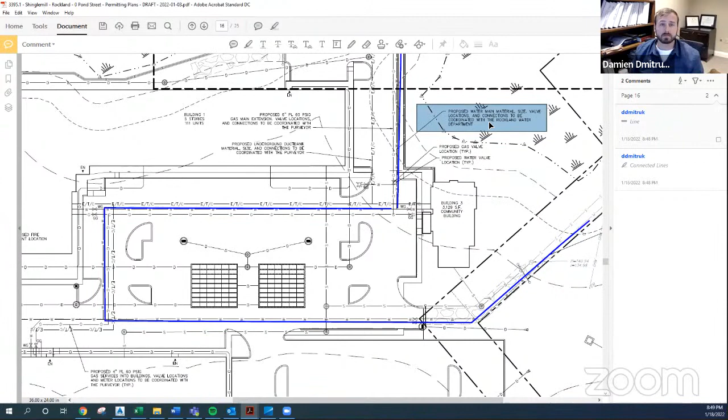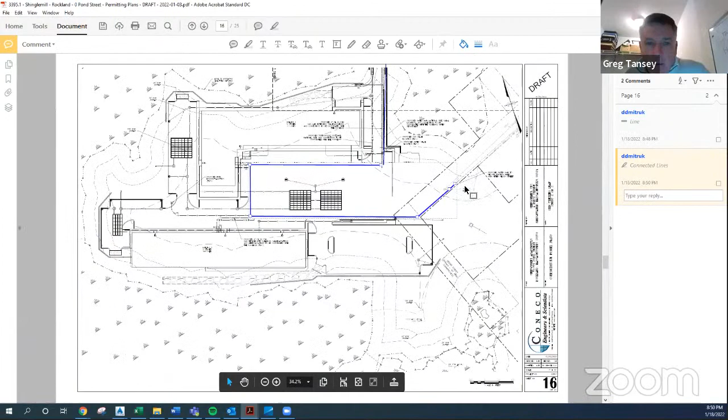What about the existing water main where you're connecting onto the private road? Used to be 6-inch. Is that a 6-inch? Yep, 6-inch, that's what it says. The minimum the fire department and water department requires is an 8-inch, cement-lined ductile iron water main, which is what Rockland requires. Are you aware of that? Yes, I mean we have a hydrant on it at 6-inch currently.

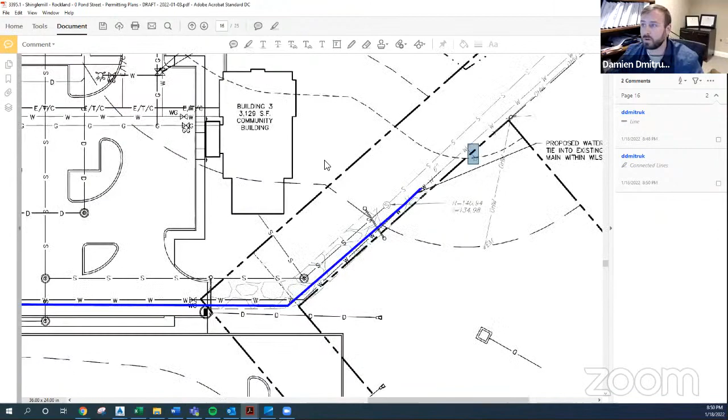Again, if it's 8-inch, we'll look at what's going on at the main access. Basically, if the regulations state you need an 8-inch, then that's a minimum, you'll have to coordinate that. I'm not sure if they're gonna allow the loop to originate at an 8-inch and tie into an existing 6-inch. That loop has to have the capabilities to extinguish a fire at 5 floors up, on a project of this scale.

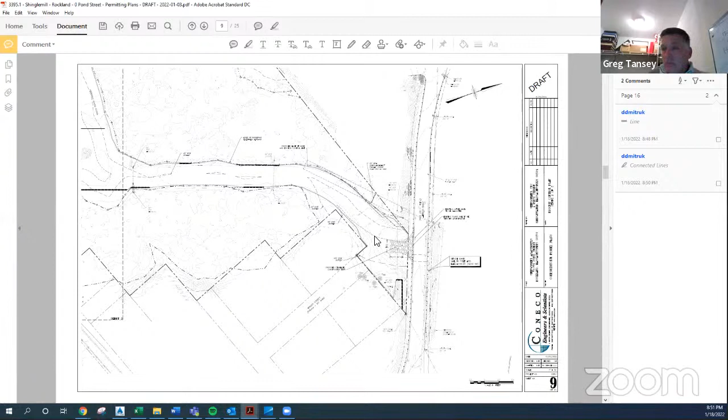So basically, Mr. Tansey, what you're saying is that if it's required, the water main on Wilson Street may have to be upsized. It might, I'm not sure, but it's a possibility. Mr. Dmitruk, I think you understand where he's going with that. It may have to. Yeah, understood.

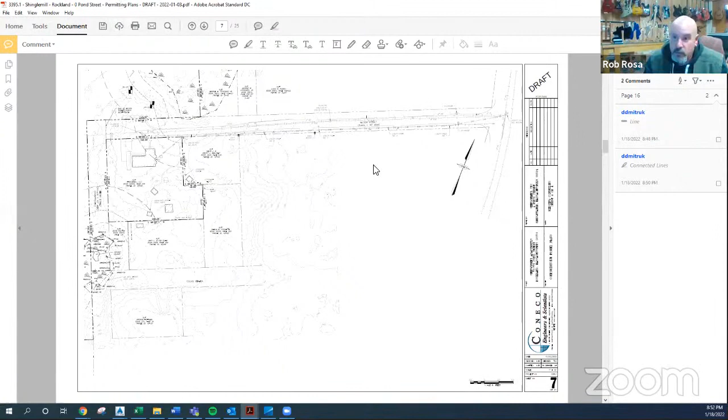That's cool. All right, so again, we need a motion to continue. Motion to continue the public hearing to March 1st at 6:30 upon receiving an extension for the continuation. Does that cover it, Attorney Galvin? Yes. You second? Second, I got a second. All right, roll call: myself yes, Mr. Baker Senior yes, Mr. Haynes yes, Mr. Tansey yes.

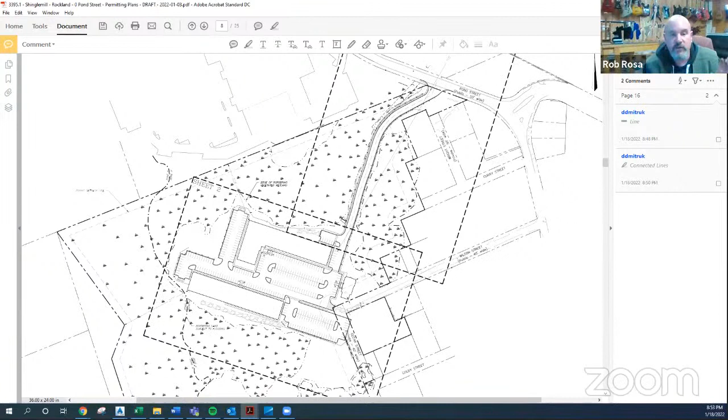Motion carries. Mr. Lincoln, you have your list, are you comfortable with it? I am. I think through the course of time you may have my email address. I think I don't. I have it, Rick, I'll get it to you. Okay, if there's any questions, any issues, if you need something or think you're missing something, email me directly.

Please tag in the zoning board email too, just tag me in there if I can help in any way, if I can refresh your memory in any way. If you need the help, just reach out. This has just been a long process, everybody's aggravated about the whole thing. I think everybody is, and if we can get this to the finish line somehow, regardless of what that finish line is, then I think everybody will be a little bit happier.

Does that work? Appreciate it. Not a problem. And again, it's not something we have to vote on, but we're going to allow Mr. Dmitruk to talk to Pat Brennan directly to try to get things solved prior to the meeting, so we don't have to hear all his stuff. If that makes it a little simpler, so be it. I'm gonna reach out to Pat in the morning and tell him the same thing we just talked about.